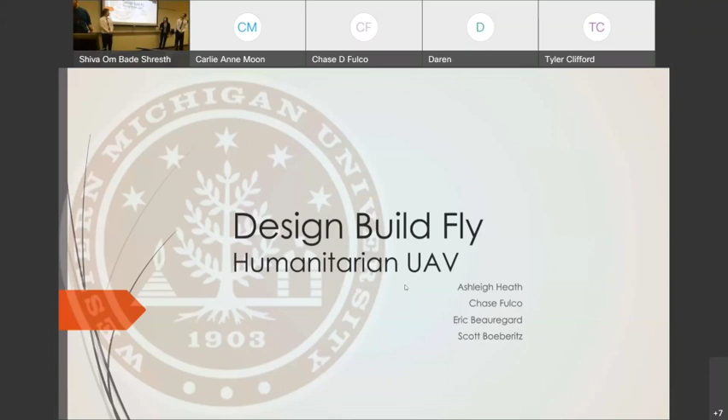Here at Western Michigan University, we have a Design Build Fly student-led organization that's been around for over 20 years, and many of us have been on the team for most of our time here. We wanted to devote as much time to it as we could, so we decided it would be a good opportunity to use it as our senior design project. This would also help us teach underclassmen and other team members about aircraft design and manufacturing.

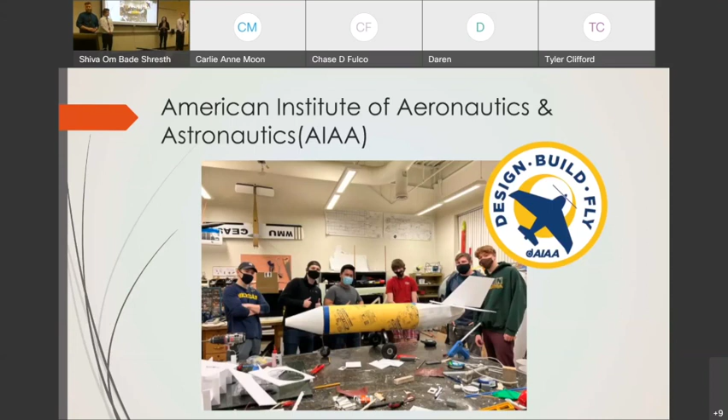Every year, AIAA gives out a set of rules for each team to design their aircraft around. This year it's meant to simulate a humanitarian mission, and we'll be delivering vaccines using our aircraft. We have 4 total missions, 3 flight and 1 ground.

Our first flight mission is the deployment mission, which is being able to take off from the runway and perform 3 laps in 5 minutes. Our second is the staging flight, where we'll load up these 30 milliliter syringes and again complete 3 laps around the flight course in 5 minutes.

The final third mission is the actual vaccine delivery, where we deliver wooden blocks meant to represent vaccine vials, equipped with shock sensors. We'll fly around the lap, drop down, and deliver one vaccine package, take back off, and repeat until all our packages are delivered.

We also have our ground mission, which is essentially a race to see how quickly we can load and unload our cargo for missions 2 and 3.

We have a predetermined flight path, the same for every mission, and our takeoff distance will also be the same for every mission, a 25-foot maximum. If you exceed that distance, you have to taxi back to the starting line and try to take off again. As for our physical restrictions, we had a linear restriction of 8 feet.

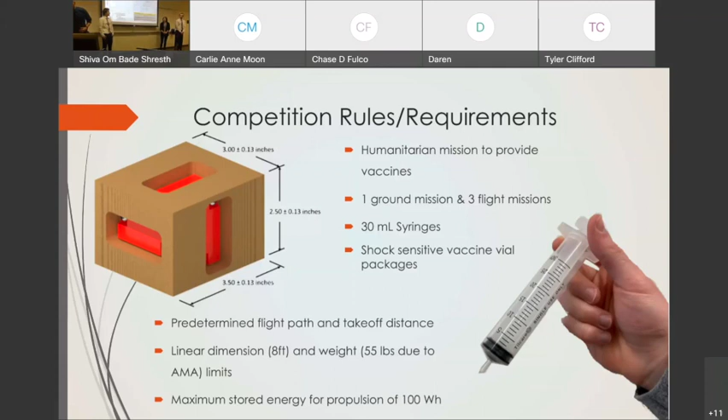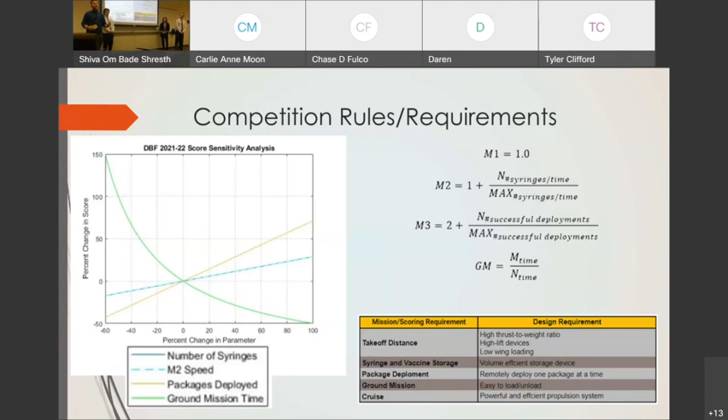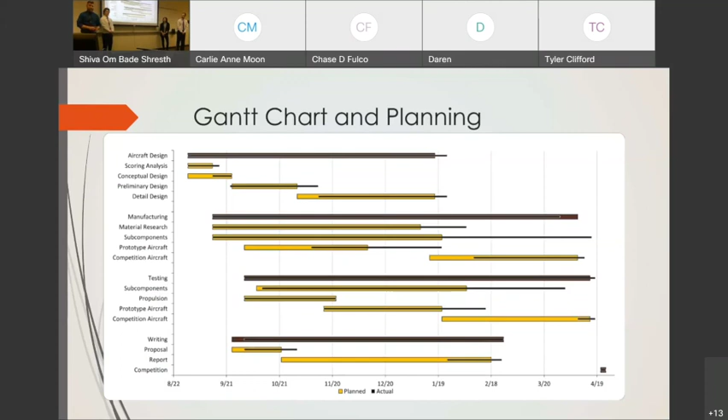This is our Gantt chart, which we use for scheduling to time out our design process. The solid brown and gold lines indicate our planned scheduling, based on previous years' experience, while the darker, thinner black lines show the actual scheduling that occurred during the design process.

For our conceptual design, regarding wing placement, we had the options of high, mid, or low wings. We chose a high wing because we wanted to make sure we had enough space inside the fuselage for any cargo we were carrying, since with a mid or low wing, the spar would go through the center of the fuselage or disrupt the cargo at the bottom.

For our landing gear configuration, we chose a tricycle design with shock absorbers so that we can easily drop out any of the cargo we need for the missions out of the bottom of the fuselage, as well as land quickly and efficiently without damaging anything.

For motor configuration, we chose twin wing mounted. Initially we planned on putting just one motor on the front of the plane, but doing the math, it would roughly be the same size as the fuselage and would not provide a lot of thrust. So we instead chose a twin wing mounted design.

For the fuselage shape, we chose a tubular design because our subsystem, which we'll be talking about shortly, is made to fit in a tubular fuselage shape, and a tube is much more structurally sound than something like a square or rectangular prism in terms of stress.

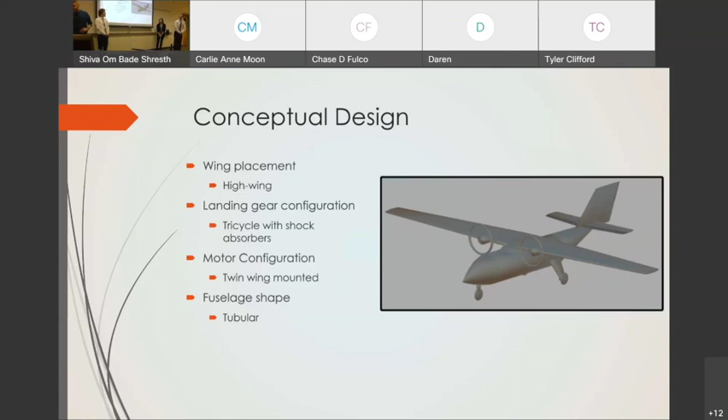Onto our subsystem design, we initially had two competing ideas. We had to be able to store syringes in one mission and deploy packages in another. Our cargo solution had to efficiently hold both types of cargo, our boxes and our syringes, and deploy the boxes in a timely fashion, all while keeping minimal weight and CG effect issues.

We started with a conveyor belt design, a moving platform connected to a servo, which when actuated would pull the entire line of boxes out until one falls out the bottom port of the fuselage, and then we take on the next lap and repeat.

We ended up scrapping this design as the amount of CG shift messed with our stability too much to be practical. Also, although it was very efficient for our box storage, our syringe storage, given their circular shape, was far less effective, and we weren't able to get as many syringes in as we wanted.

Instead, we moved on to a rotary design, in which our boxes go in the sides, and we're able to actuate it through a servo on the end, which when it rotates to meet the port, the hole in the bottom of the fuselage, our package releases, and we fly into the next lap, in which we turn another partial turn.

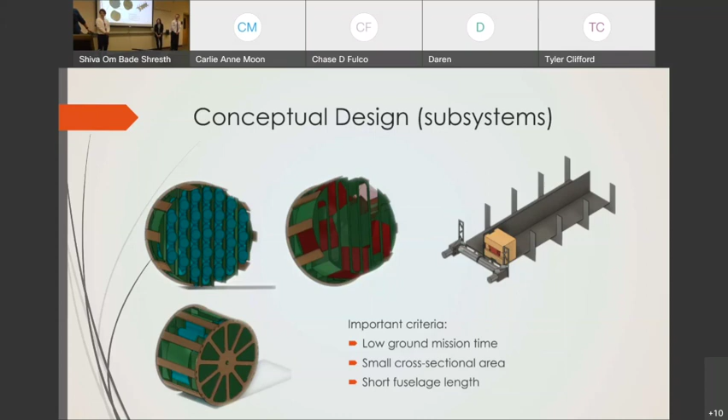In addition, when we got to our final subsystems, we had to make some edits to meet our final fuselage designs and size constraints, changing some of the patterns, and we had to design shock absorbers.

In order to maximize our score for mission 3, we have to get out as many packages as possible. Since we can only drop one per lap, we have to land each time and do it quickly, which means hard. In order to take the load and not damage any of the plane structure or cargo, we had to make a solution that would absorb that shock and distribute it without going through the fuselage.

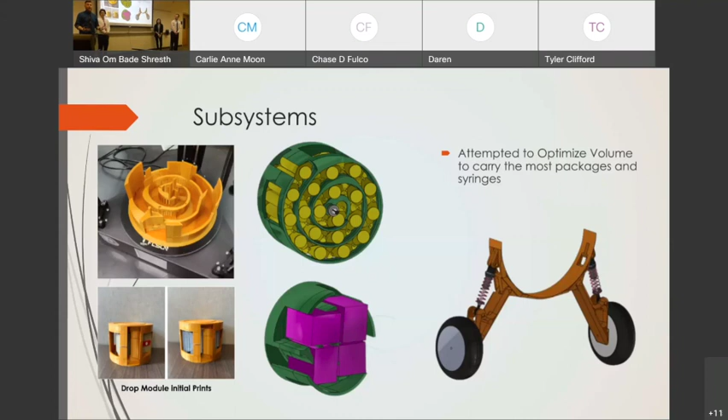After all the conceptual designs were finalized, we then had to go into more detailed analysis. We began by analyzing the power-to-weight ratio versus the wing loading for different takeoff distances and cruising speeds.

We set a goal of a maximum cruise speed of 100 miles per hour for mission 2 and a takeoff distance just short of the 25-foot limit. This resulted in a wing loading of about 3 pounds per square foot and a power-to-weight ratio of 170 watts per pound.

After getting these numbers, we were able to calculate how much thrust would be required to take off within 25 feet, which came out to about 16 pounds. We then used that with the power required to size our motor and battery propulsion system. We selected a 33-volt lithium polymer battery.

With that information, we were able to perform an iterative analysis to further determine physical characteristics such as wingspan, wing area, estimated weight based on previous year's aircraft, and aircraft performance such as lift, drag, and cruise speeds for each mission.

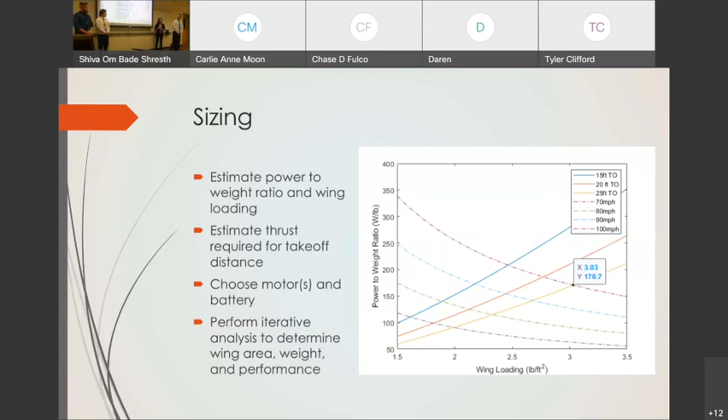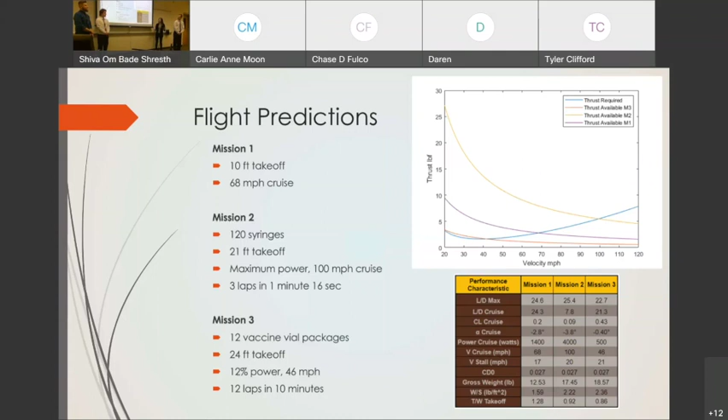When we got to our detail design phase, we began to consider using composite materials for our main fuselage and body. However, due to the restrictive cost of the materials, we decided it was imperative to verify them prior to purchase. To do this, we utilized the SolidWorks FEA package to get an idea for whether we would be reasonably capable of carrying all of our weight and performing our flights without damaging the aircraft, either on landing or in the air, while also including a factor of safety.

To ensure that even with our inexperience and any missteps along the way in manufacturing, we decided to take all of our loads and put them to the extremes. We overdid the weights and stresses we were expecting to experience and put them at the most inconvenient spots they could possibly achieve with our geometric design, to see if it would fail even at this extreme case.

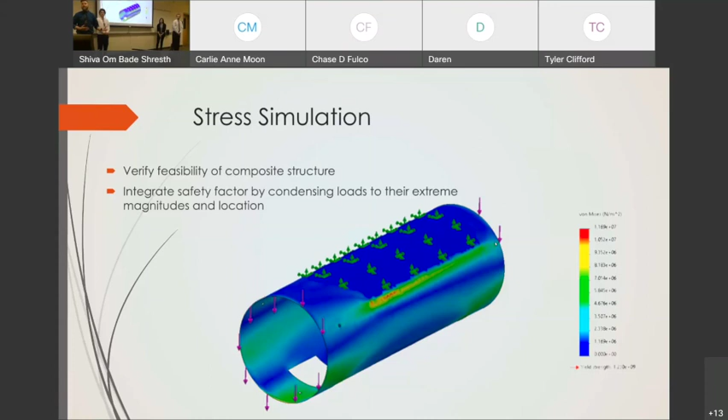Another SolidWorks simulation that was done was a flow simulation over the wings, to better understand how much lift would be generated from the addition of high lift devices such as flaps. We need to meet a 25-foot takeoff distance with a fairly heavy aircraft, so we had to deploy some sort of high lift device. We did a lot of research on slotted flaps, which create a slot between the bottom of the wing and the top of the flap, accelerating the airflow and keeping it better attached to the flap, making it more efficient than a plain flap.

This flap is about 25% chord and half span, and the analysis was done at a 10-degree angle of attack and our takeoff speed of 25 miles per hour, which only resulted in about 17 pounds of lift, a little less than we were hoping for.

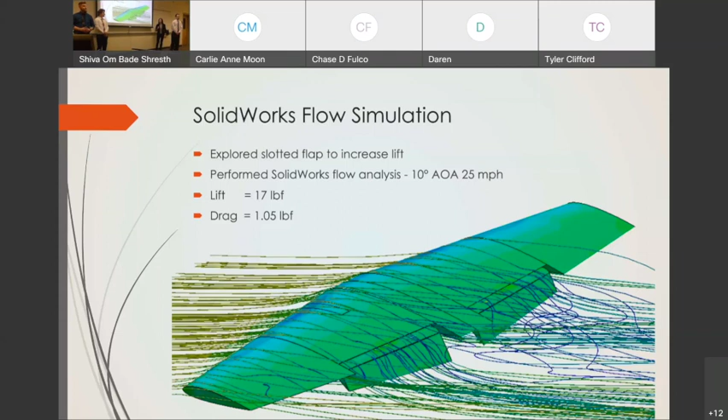So to further analyze the effect of flaps, we wanted to do some real-world testing in wind tunnels. Unfortunately, due to scheduling conflicts, we weren't able to get into the wind tunnel here, so we ended up using our prototype aircraft to test different types of flaps.

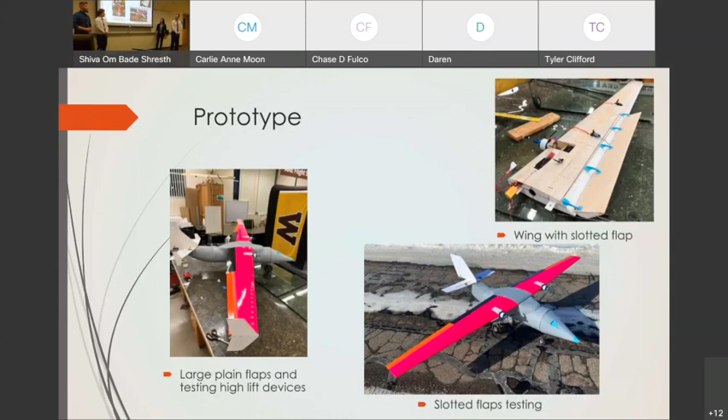We began with the slotted flap shown previously. You can see the complicated 3D printed hinges that give us the nice slot between the wing and the flap. After getting some tests on that flap, we then moved to very large 40% chord plain flaps and conducted some testing with those too, to compare takeoff distance.

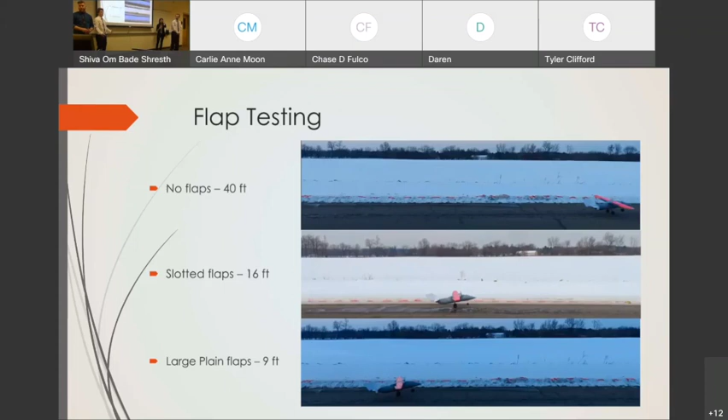Here on the right, you can see some lines in the background indicating the distance at which we are taking off. With no flaps engaged, we got a takeoff distance of about 40 feet. With our slotted flaps, we got a takeoff distance of 16 feet, and with our large 40% chord plain flaps, we got a takeoff distance of about 9 feet. Due to how complicated the manufacturing process is for the slotted flaps, and the overall better performance of the plain flaps, we decided it would be best to go simply with the plain flaps.

But not all was lost, because we did find areas for improvement with our aircraft. We decided to increase our wing area, and we also decided to change our airfoil from a NACA 1415 to a NACA 6415 airfoil, which has a larger camber and provides greater lift. Again, with the larger plane, flaps were something we decided to implement.

We also wanted to implement an overall cleaner design by streamlining some of the surfaces, such as adding coverings where the servos are mounted and adding cowlings over the engine or motor blocks.

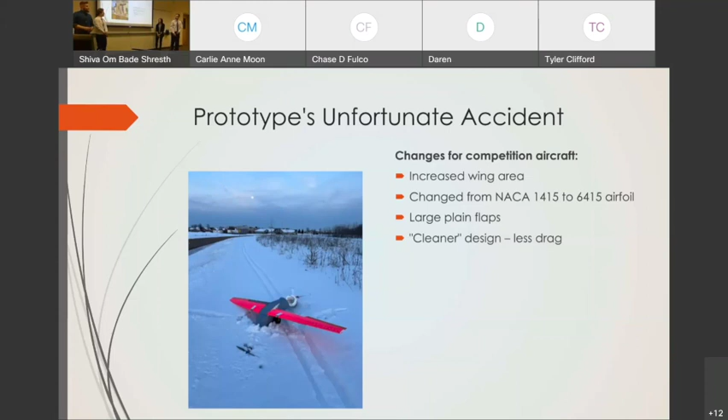As was discussed earlier, we wanted to use composites in the final plane, but due to the expense of composite materials as well as the workability of using them, we made sure to use them only on the final plane. We began by 3D printing the molds in sections. We didn't have the benefit of a much larger print bed, which would have been nice, but we still made it work.

After the mold sections were 3D printed, we glued them all together into these shapes, sanded them down, and filled them in with a P17 white resin, which is similar to Bondo but more specified for this application. Afterward, it was sanded again so the entire inner surface of the molds was completely smooth.

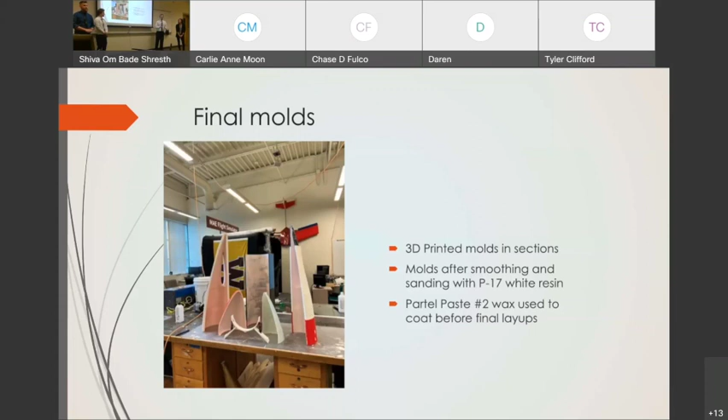The molds were then covered in Partel paste number 2 wax to make sure the composite layups we put in the molds would actually separate from the molds instead of bonding to them. Otherwise, we'd have to destroy the mold or risk damaging the composite itself.

Our team hadn't done composites in several years, so we contacted a local expert for help and assistance, which was very helpful overall.

We began the process by putting a sheet of glossy film down on the table and coating it entirely with resin. From there, we put the composite material over the top of the glossy sheet and used a series of brushes to dab resin into the material, making sure the resin got into as much of the fiber as possible.

An additional sheet of glossy film was then put over the top of the material, and the additional resin was squeezed out to the edges of the film. At this point, we essentially had our own sheet of pre-impregnated carbon fiber material, which allowed us to cut it easily into whatever shape we wanted and get rid of all the loose fibers and strands on the edges.

From this point, we put the entire sandwiched material into the mold and started removing the glossy film sheets, almost like stickers, pushing the material into the corners of the mold and cutting any relief cuts needed to make sure the entire surface of the composite layer was smooth.

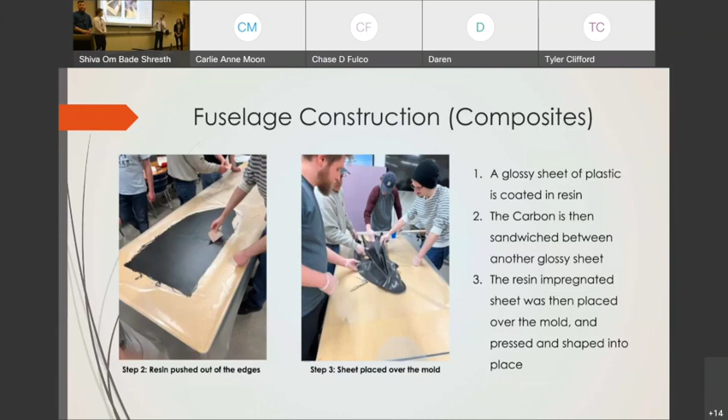Afterwards, we added breather material over the entire layup with the mold in it, then put it inside a vacuum bag to make sure it ended up in the exact shape we wanted. We were recommended to leave it in the vacuum bag for only about 4 to 5 hours, but we ended up doing it overnight to make sure the resin actually hardened and was solid. After retrieving each composite layer, because of the glossy film we used at the beginning, we got a fantastic shiny surface that looks extremely professional and very nice.

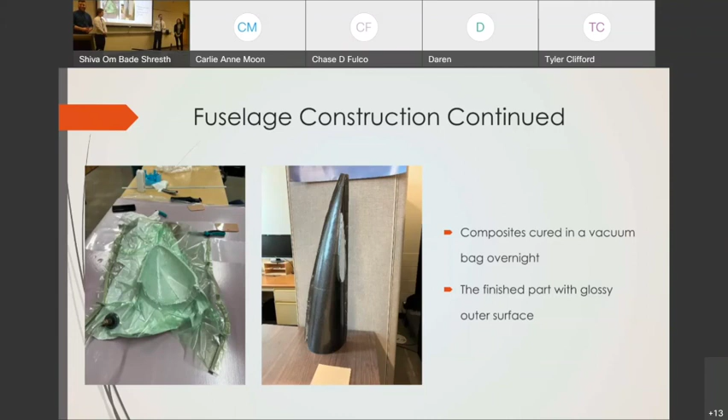The wings are constructed in a different manner. We used a foam block, shown in the left picture, which is a very lightweight EPS material, about 1 pound per cubic foot. We've done this for years at DBF and it's worked great, so we decided to continue using it.

We start by cutting out an airfoil template from plywood and cutting it out of the block with a hot wire cutter. This allows us to get any taper or sweep that we want, and it's pretty quick.

We're then able to take that foam core and add in any additional reinforcements. In the CAD model, we've got one carbon tube and a carbon spar that runs the full length of the wing. The tube allows us to conjoin both wings to the fuselage and allows the motor box plywood construction to be solidly adhered to a carbon tube instead of just the foam.

After all the internals were completed, 1/16 inch balsa was epoxied to the entire outer surface of the wing to further aid in resisting bending loads in flight and to provide a smooth, low drag finish.

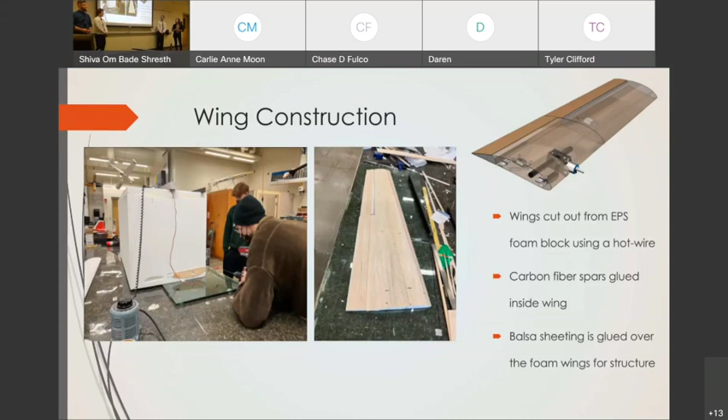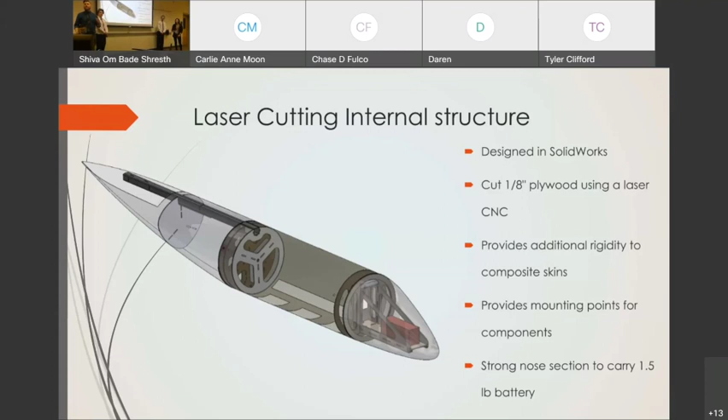So in order to avoid any flexure of the fuselage causing a clamping force down on our modules, which would restrict their motion, we ended up putting in laser cut formers made out of 1/8 inch plywood. These are glued in place at the front, holding the two halves of our fuselage together and ensuring they can't deform from their circular shape. The ones in back provide support at the mating joint between the tail and fuselage, which is held together with a press fit, as well as an external loading screw to hold it in place.

So we were able to fit in some real-time flight testing with the new plane. Weather did hold up for a day or two, fortunately for us.

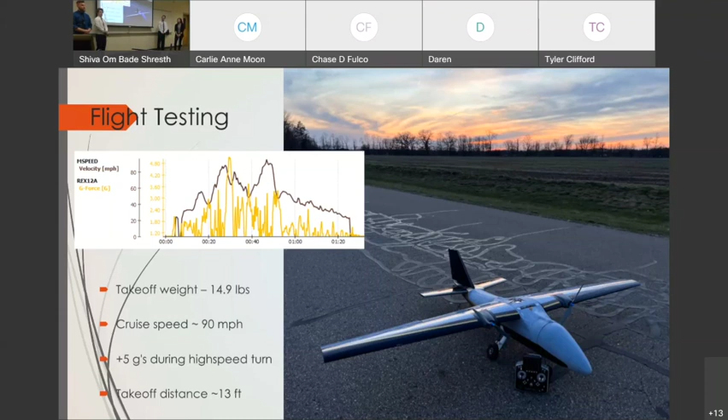This picture is a small sample that we took from one flight test. The brown curve represents our in-flight speed, and the gold curve represents G-forces experienced in flight. Our total takeoff weight with no cargo included ended up being 14.9 pounds, a little heavier than what we were hoping for, but still workable. Our top cruise speed was about 90 miles per hour, but we were able to pull about 5 Gs during a high-speed turn, and we had a takeoff distance of about 13 feet. With our estimated lift coefficient of 2.5, we estimate that with our plane fully loaded, we should be able to take off in about 23 feet.

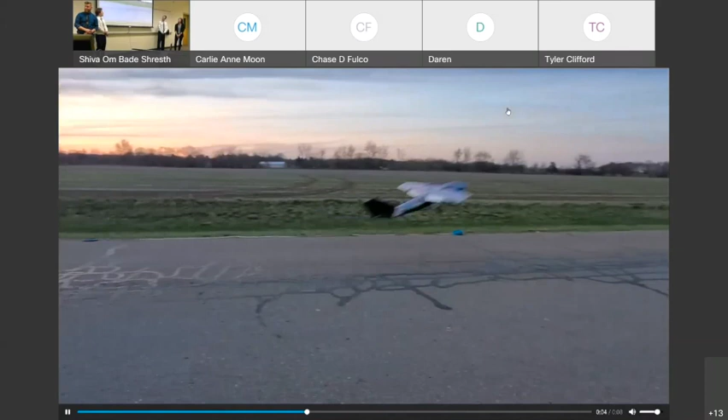Here you'll see in the video, I actually don't follow the plane that much because I was not expecting it to take off that fast. But that just proves how effective our design was in the end.

So in the end, the actual empty weight of the aircraft ended up being about 15 pounds, whereas we had estimated, hoped it would be closer to 12.5 pounds. We think this variation occurred from our inexperience with composite materials and possibly over-designing some portions of the aircraft. The tail section is definitely heavier than expected, which resulted in quite a tail-heavy plane, which if we had flown in that configuration would have made the aircraft unstable and probably crash.

Another issue was the landing gear was initially too far behind the center of gravity, which made it hard to rotate the nose during takeoff.

So after finding these issues, we came up with some solutions before competition. We decided to unfortunately abandon one of our drop modules and only carry 80 syringes, or 8 packages. We also moved the landing gear forward, added some nose ballast weight, and that got us into a stable condition with a decent center of gravity and an actual maximum weight of 19 pounds, which is close to our maximum estimate of 18.5.